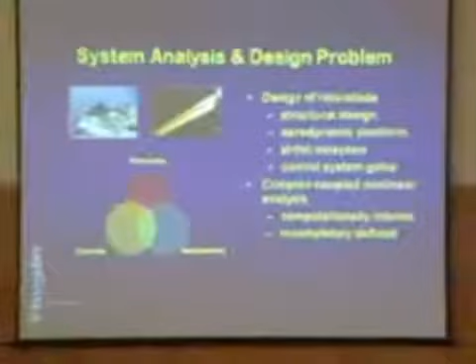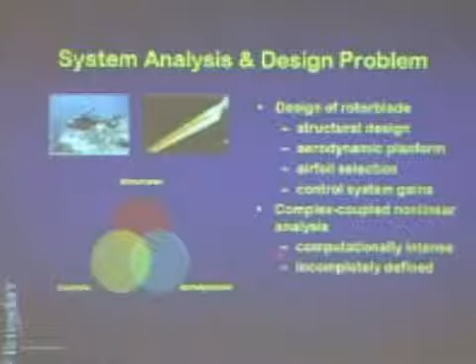We'll start with an example. Here's a helicopter rotor blade. The design of this blade requires interactions between disciplines like structural design, aerodynamics, control systems. You see that I've represented in this cartoon sketch each of these disciplines by these 3 circles, but there is a great deal of overlap or interaction or coupling that exists between these subsystems. The analysis that is involved is computationally intense and in many instances is incompletely defined. You must resort to experiments to get a certain amount of information back that could be used in the design process.

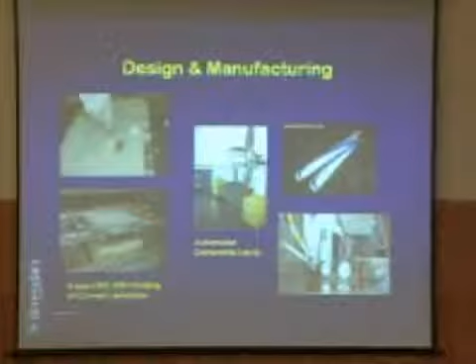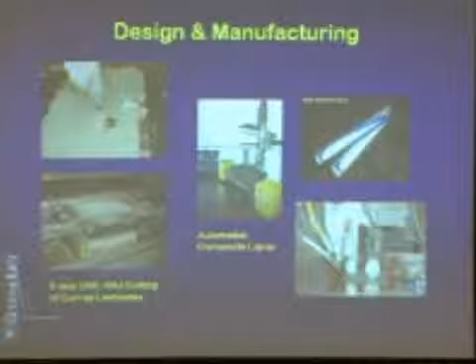A third example, you have to include effects of manufacturing in the design process. So here you see an automated composite layup machine in which you have a robot arm which lays out composite fibers over a mold at specific angles. Here's this curved panel in which you are cutting out certain objects, again by an electronically controlled machine. The issue here is that we would like to migrate the manufacturing process as early in the design process as possible. And in order to do that, you must have models which represent the manufacturing process itself.

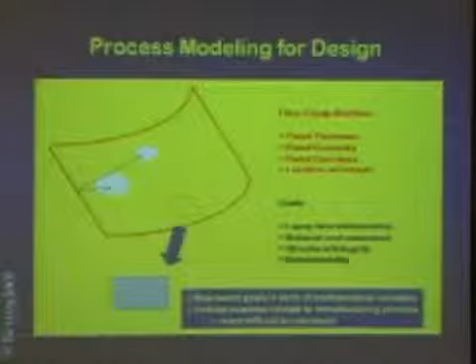Here's a more detailed representation of that. Here's that curved panel. I have put some cutouts here. These cutouts might have to be placed because this panel is covering a cavity which you might have to access for maintenance purposes. So here's your fiber layup machine. It has to control the panel thickness, the geometry of the panel, the curvature, as well as the location of the cutouts. And the goals of designing this might be, you might want to minimize the layup time that is required to build this panel.

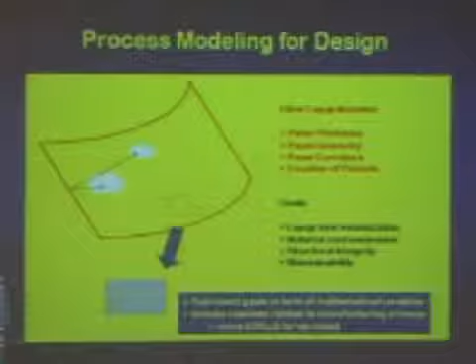You certainly want to minimize the material cost. Of course, you want to guarantee structural integrity of this part, and then place these cutouts in such a place that you can actually maintain this object that you are trying to cover with this panel. So the goal of this is you must be able to represent all of your design goals in terms of certain mathematical variables.

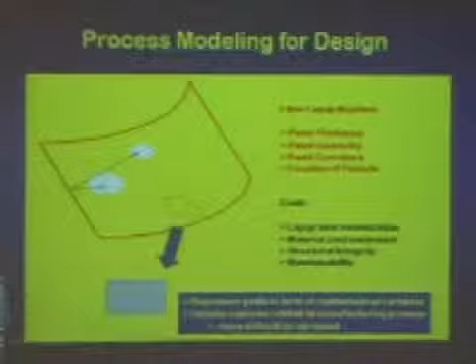As well as be able to include nuances that are related to the manufacturing process. Not all manufacturing processes can be modeled exactly. You sometimes have to go to the shop floor to get feedback from the operators on when a machine functions well, when it fails, and be able to model that into an appropriate mathematical format that can then be used by your standard design algorithms, which might be your classical mathematical programming algorithms or soft computing algorithms that were discussed earlier this afternoon.

So, in summary then, the system analysis and optimization problem that we'll talk about here has these characteristics. The final product or system is generally an integration of several distinct subsystems. There are design parameters and constraints in each one of these subdisciplines, and the overall desired objectives are essentially met by varying the parameters within each subsystem. Collectively, for all of the subsystems, the number of design variables and constraints may be quite large. And also, you cannot, in most cases, conduct design in isolation because changes in design parameters that take place in one discipline have an adverse or beneficial effect in another subsystem. So you have to take those couplings into account as you go through the design process.

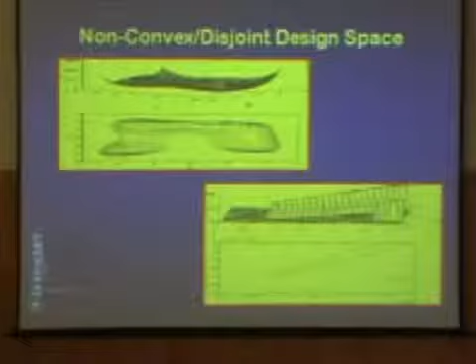This quickly is an illustration of a non-convex space, a classical function with 4 local optima. In this case, each one of these 4 local optima has the same objective function value. Your traditional gradient-based techniques will converge to the nearest local optimum from where you start. Here is an example of a disjointed design space where you have regions of feasibility separated by large regions of infeasibility. So when you get into one of these feasible spaces, it's unlikely that you're going to get out of them using your traditional gradient-based mathematical programming algorithms.

So what are the soft computing adaptations that I will talk about here today? Neural networks and fuzzy logic. Dr. Kumar talked about surrogate modeling of the analysis. That's certainly one application that we have used extensively. Discovering causality in data becomes important as well, because if you have a large optimization problem involving a very large number of variables, you want to perhaps break it down into a sequence of smaller, albeit coupled problems. You would like to find out which variables affect which design constraints so as to make a rational choice for that decomposition. Again, artificial neural networks have been used in that process as well.

Genetic algorithms certainly have been very useful in designing non-convex and disjoint problems, as well as topology and layout type of problems. And when you talk about nano assembly, for example, which are topological problems, genetic algorithms have a significant role in that regard as well. I'll talk a little bit about immune network modeling. This is a variant of genetic search, which I'll show how it has been used in problems of constraint handling, as well as in accounting for the interactions in decomposition-based design. And finally, I'll say a few words about cellular automata and the implications of this particular computational paradigm in both system analysis and design problems.

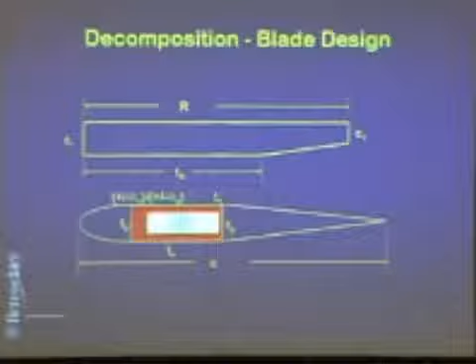But it's interesting to see that in subsystem A, masses M1, M2, M3, which are the three masses closer to the root, fall into subsystem A. Subsystem B does not contain any of those masses, and M4 and M5 actually go into subsystem C.

So in a typical industry type of design environment where people are constantly fighting about control of design parameters, this kind of an approach gives you some leeway as to how to partition the design space and say, you folks essentially control these variables. The variables that belong to another subsystem actually impact their design problem far more importantly, therefore they should go there.

Counter-propagation networks, similarly, as I had shown earlier, could be used for approximations, and this is that same problem, where I'm mapping the forces and moments at the root of the blade in terms of the design variables, and you can see again that you get a fairly good degree of approximation, so the CPN could also be used as a function approximation tool.

Quickly turning our attention to the next paradigm, fuzzy logic based modeling. Again, Dr. Kumar spoke of this earlier, but what we mean by this is that for a typical designer, it is sometimes important to keep that fuzzy information in the design problem. When you convert it into a crisp form, you sometimes lose the original intent of the problem statement. Stating it in this fuzzy form allows a smooth transition between the two bounds.

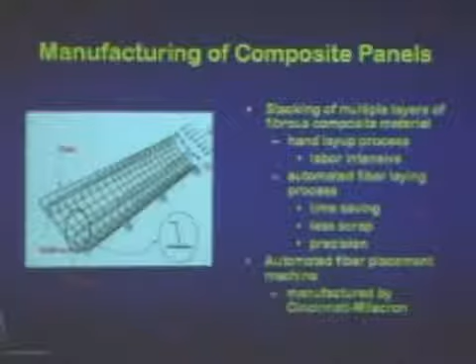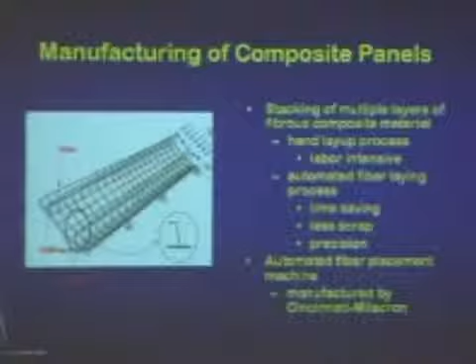Manufacturing of composite panels could be laid up by hand, which is a labor-intensive process, or you could resort to an automated fiber layup machine. You can get time savings, less scrap, as well as precision if you use this machine. There's a machine manufactured by Cincinnati Milacron, called an automated fiber placement machine. You essentially build a mold of a part, and then the machine can traverse at various angles, at various speeds. It can compact the fiber as it lays it down. All of those wonderful things it can do.

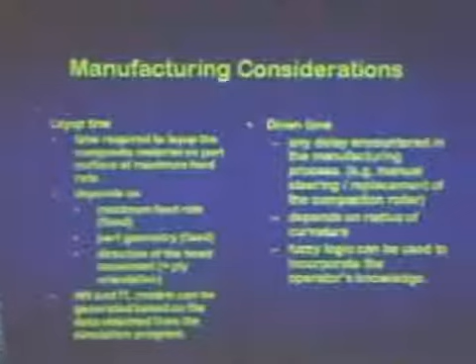But while in theory that works fine, if you go to the manufacturing floor and talk to the people who use that part, they will tell you that there are some problems with it. So the layup time that we are talking about here depends on the maximum feed rate. How quickly can this part move back and forth? It depends on the part geometry, as well as the direction of the head movement.

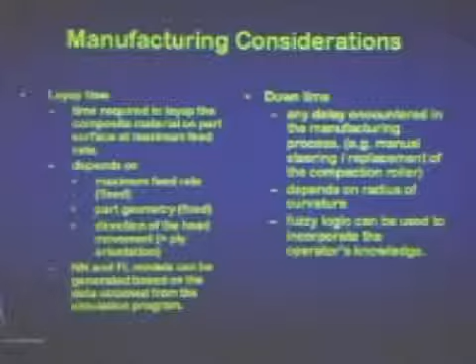So all of these design parameters also affect the structural integrity of the part, because the fiber angle will tell you how stiff the panel is, right? The thickness will tell you how stiff the panel is. The curvature of the panel tells you how functional that panel is. All of those are in fact also dependent upon the manufacturing considerations, because the layup time of this machine may or may not be optimized depending on that. So you would like to include those manufacturing considerations in the design process.

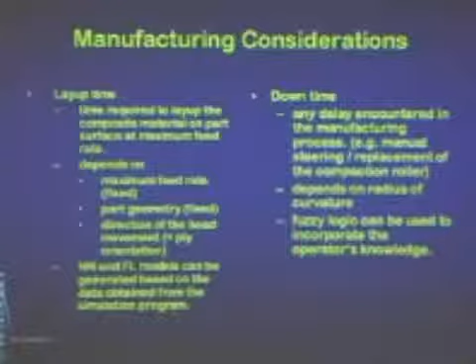Any delay that is encountered in the manufacturing process we refer to as downtime. For example, the operator has to stop the machine and then manually steer it in a particular direction, or has to replace a compaction roller. If the radius of curvature of the panel is too small, then you have to put in a smaller roller, otherwise the fibers will form a bridge between the two sides. So all of these things require careful monitoring in the design process.

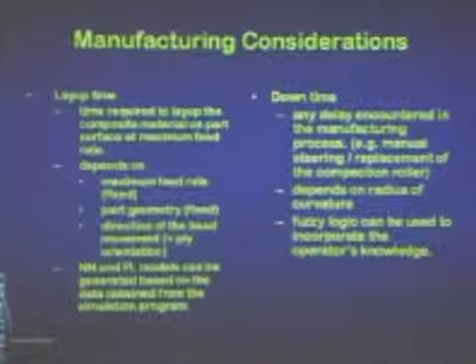You could use fuzzy logic in effect to incorporate the operator's knowledge. So this we did as a DARPA funded project with Boeing. We went in and talked to the operators who were using this machine. They told us that, well, for radius of curvature typically less than 60 inches, the machine has to be slowed down and manually steered.

Okay, so here's one piece of nugget. The speed of the machine needs to be reduced as the radius of curvature decreases, because otherwise you get longer downtimes. For radius of curvature close to 5 inches or less, the roller should be replaced with a lower bandwidth roller. Again, you see that there is fuzzy information being transmitted. Minimum allowable radius of curvature is about 1 inch. Again, fuzzy information. And the corresponding downtime is approximately 1 hour.

So you get all of this information feedback from the operator, and you essentially could then go ahead and say that, all right, I'm just going to create 3 sets of rules. If the radius is small, then the downtime is long. If radius is medium, then downtime is average. If radius is large, then downtime is short, based on all of those rules. And here are the input-output membership functions. Here is the kind of a model that we produce, that the downtime based on the radius of curvature is represented by that simple chart.

Now, once we have that model, this could be brought back into the design process and be part of the mathematical optimization or genetic algorithm or any other algorithm that you want to use to solve that optimization problem. But you now have a mathematical representation of the problem that you could use as part of the design.

So this brings me then to the subject of genetic algorithms and evolutionary strategies. These are certainly algorithms that are patterned after natural evolution. They are population based. That's the critical thing to remember. There are some advantages to having a population based search. There are also disadvantages. You essentially start out by taking your designs and mapping them into string-like structures, and then apply typical evolutionary operators such as crossover, mutation, selection, and so on that you encounter in biological principles of evolution.

It's very easy to represent and handle discrete variables and templates in this type of genetic algorithm-based approach. There is no requirement of sensitivity information or function continuity. So 2 things that I spoke about earlier: disjoint design space and computational cost. Getting function information is one thing, getting the gradients of those functions is even a harder level problem. So if you can avoid getting gradients and have an optimizer that helps you get to the solution, that is a plus in your favor.

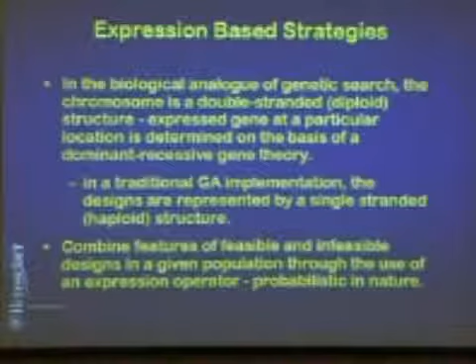In a traditional GA-based search, the designs are represented by a single stranded structure. Remember, we just have a single strand of 1s and 0s, so that's the haploid structure. So could we actually borrow from this principle and say, let's combine the features of feasible and infeasible designs in a given population through the use of an expression operator, which is probabilistic in nature.

So you reduce this down to a single parameter p sub e. This has been successfully implemented in genetic search and actually is shown to be a much more robust way of handling design constraints than the penalty function approach.

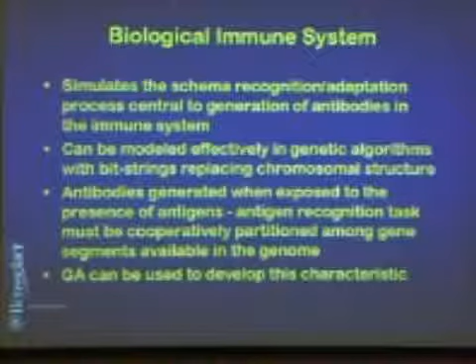Okay, so this now brings me to the topic of biological immune system. What this is, it actually simulates the schema recognition and adaptation process which is central in biological immune systems. What is it that generates antibodies in our immune system when it's attacked by an antigen, for example? It has been shown that this can be modeled very effectively in genetic algorithms with essentially your bit strings replacing the chromosomal structure. The antibodies are generated when exposed to the presence of antigens, and this task has been modeled in GA. Let me show you how it would be done.

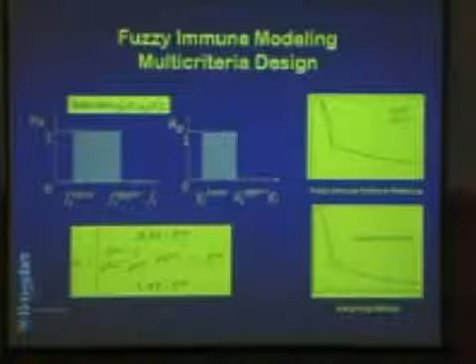So you could use a counter-propagation neural network and use only those subsets of variables that are germane to a particular subproblem, with representations of other variables left out, and still be able to construct an approximation to the output, and use that approximation to do design in each of the decoupled subsystems. So that's the very simple idea of using counter-propagation networks with pattern completion capability to actually do decomposition-based design.

You can also do coordination through immune network modeling. You could actually have two subproblems, subproblem A and subproblem B. You do evolution in each one of these. You select the best designs in each of these subproblems, label them as antigens, and now you do an immune network simulation to generate generalists.

So in fact, what you're doing is you're averaging what goes on in each one of those subsystems. Use those updated strings to actually continue this process till you get convergence to the desired design. So this allows the process to actually converge as opposed to diverging, where the 2 subproblems may be going off in different directions altogether.

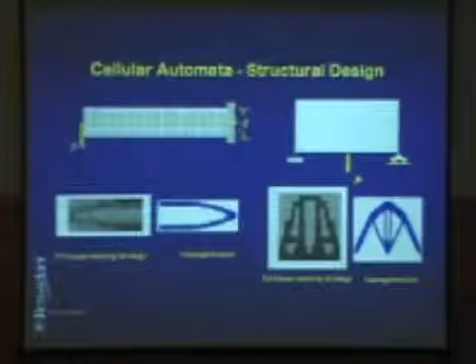Likewise, here's a plate, and you want to carve out the least weight grid that can carry this central load. Results of homogenization shown here, results of a CA-based resizing strategy shown on the adjoining chart. So it has been used in this context as well.

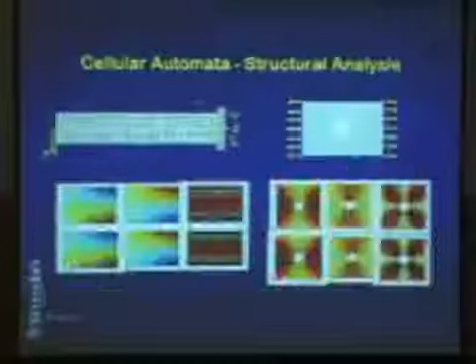if you go back to this particular problem that we talked about, the elasticity problem, if you think of these cells as interconnected by elastic springs, and you want to find out the k value of those elastic springs based on the thickness, that becomes a state variable which is defining the design of the element.

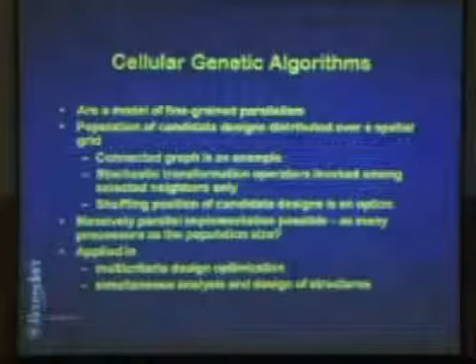So in addition to your GA-based, you could also use the variables corresponding to the analysis as design variables, and these could become additional state variables at the site, in which case when you evolve the state vector, you're simultaneously solving the analysis and the design problem together. So for those of you who are familiar with optimization algorithms, this is the paradigm that is referred to as SAND, S-A-N-D, or simultaneous analysis and design approaches.

Let me close this presentation now by simply stating the obvious, that soft computing algorithms provide remarkable flexibility in the analysis and design of engineering systems. Applications have ranged from optimization to real-time control as well as system modeling approximations. Really the research frontiers in this area are at the interface of algorithm implementation in hardware. I believe that's the next big step that we are going to go through, as well as other physical and natural systems, including biological systems, in fact.